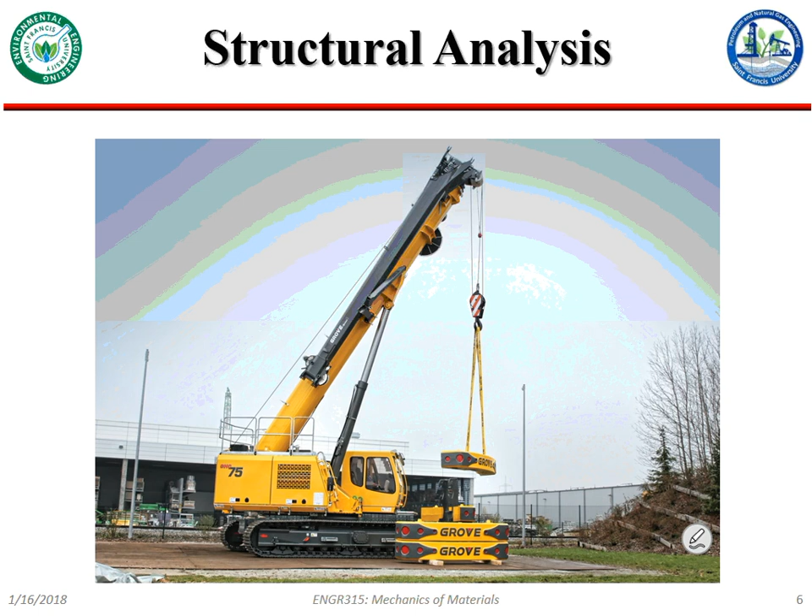So we're going to start with cranes. You're going to see this diagram a lot in the next week. If you have some paper, pull it out, because we're going to start with a quick static analysis of this, and then we're going to start throwing stresses and all that kind of jazz at it. If you want to sketch out this basic structure, you can imagine these 2 points here are both pin joints. Oh yeah, this is a pin joint too, so all joints are pinned. Ignore the gray thing, it's just kind of there. We have an arm here.

And if my sleeve didn't hit it, it'd be even better.

We have an arm here that's supporting some load. If you looked at the next slide, we're going to find out about it. And that arm is being supported by a hydraulic ram.

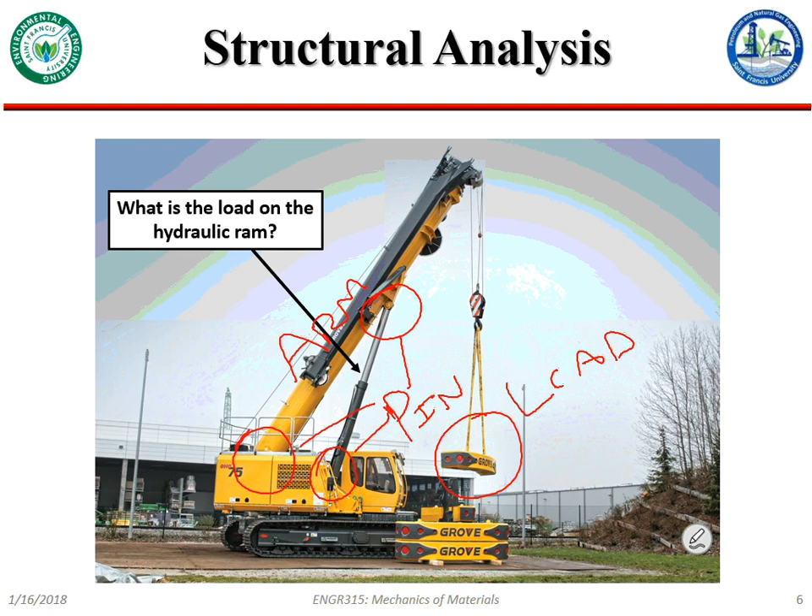So it's an 11,900 pound support arm. Turns out that cranes are really stinking heavy. And the length of this arm is 36 feet.

Got that already in there. Yeah, that should be all the information you need at present. So just let me know when you're done writing that down, because the next thing we're going to do is solve for all the forces acting on this.

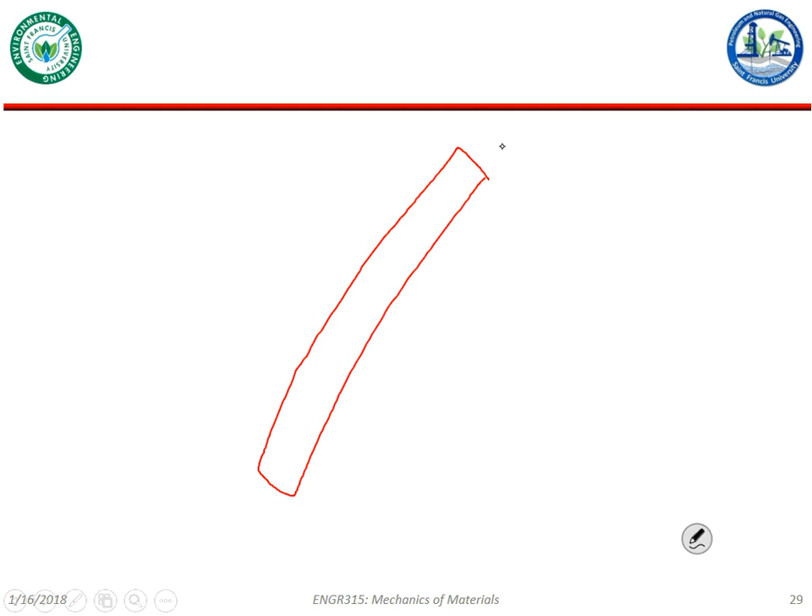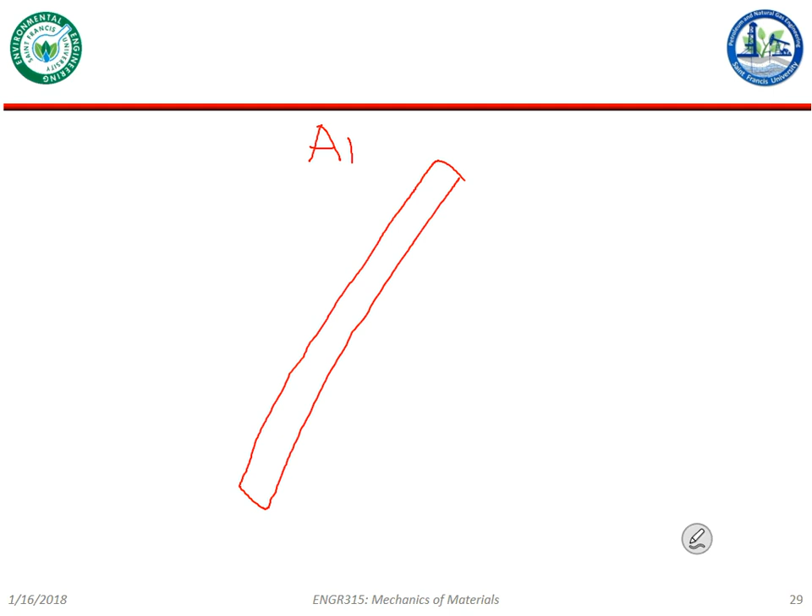Okay, so like I'd have something like this. So that's a really weirdly shaped arm. Hang on, let's see if I can at least draw a straight line. Okay, so this is the arm, say. Wow, that's a new one. Cool.

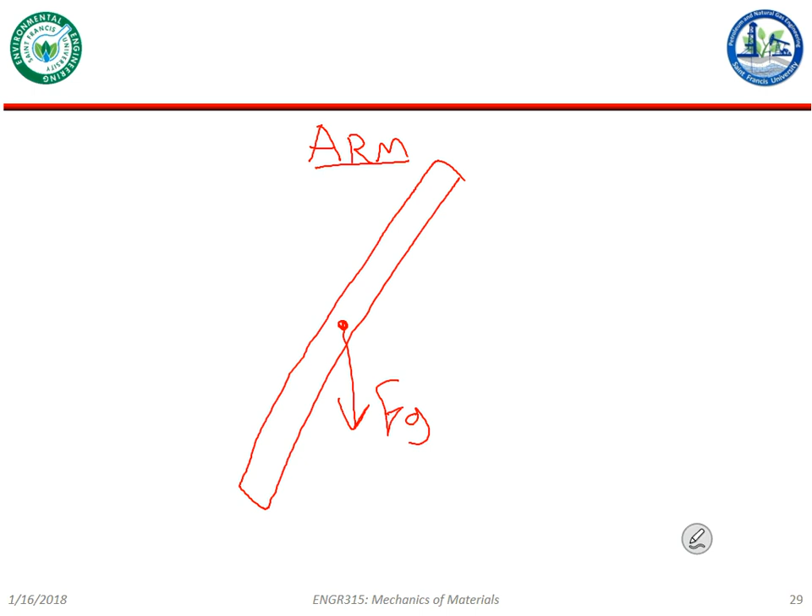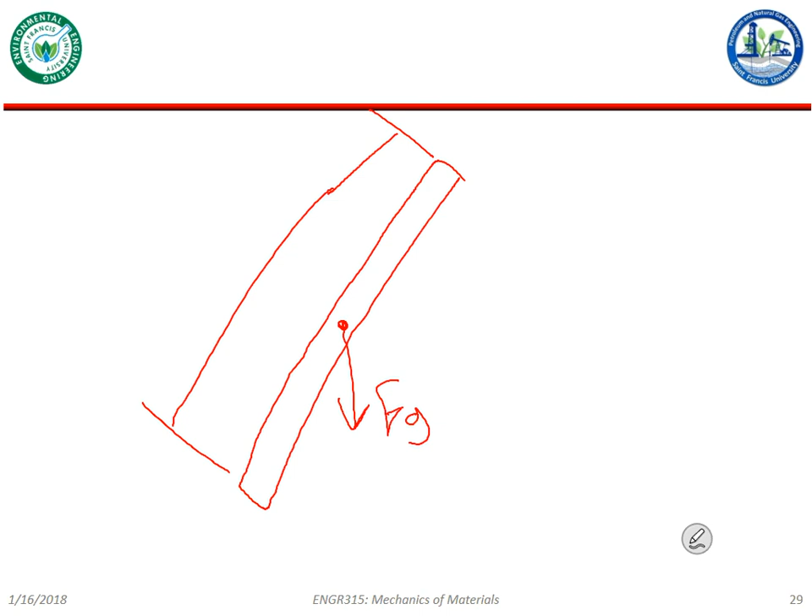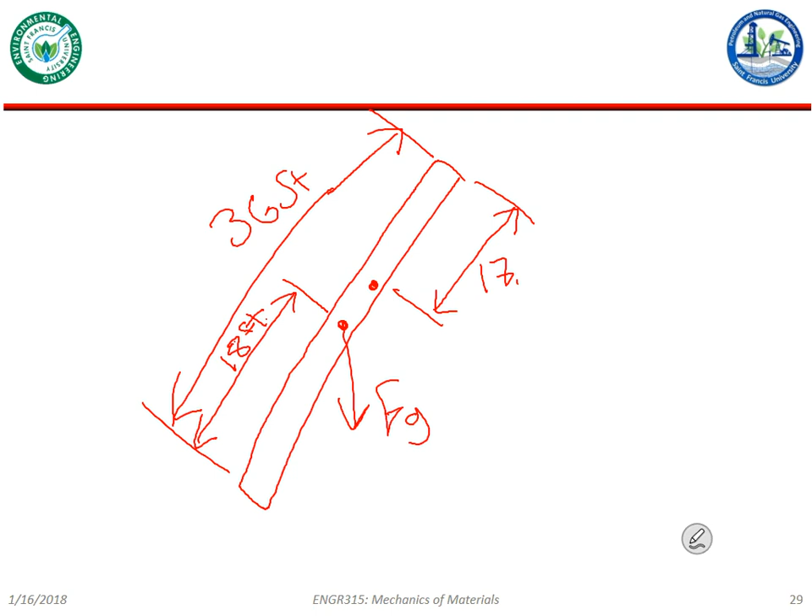Hydraulic arm, there's a ram in the middle. Okay, well, it's not exactly in the middle, it's 17.3 feet. Very, very good. So it's about there. This is 17.3. I probably need to get a couple more rubber bands for next time. 17.3 feet from the top.

We have a hydraulic ram pushing in. Do we know the direction of that? I don't know. Okay.

Let's look at that hydraulic ram. What are the boundary conditions on it? Okay, so it's angled 20 degrees from the vertical. But what's holding it at each end? Is it fixed? Is it like rollers? Is it a bearing? Is it pinned? It's actually pinned. It's actually pinned.

So can those pins resist moments? Can pins resist moments? The answer is no, right? So let me give myself a little more space here. So this is force due to gravity. If I have my hydraulic ram here, and it's pinned on each end, those pins cannot resist any moments.

Can this force generated from this pin or this pin generate any moments on this? If there are no moments acting on the hydraulic ram, can the forces create any moments? Does that question make sense? Yes? No? What? Okay.

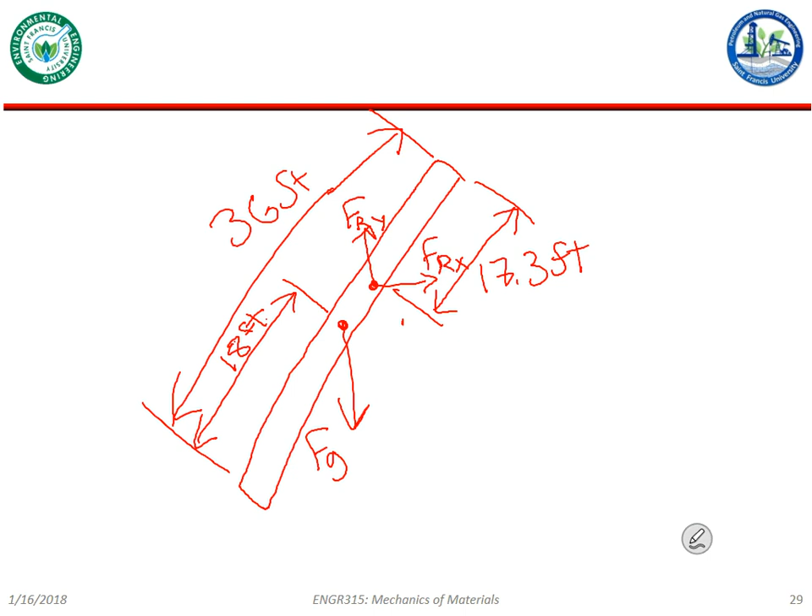Are there any other forces poking at the arm? The counterweight. So the thing dangling from the end, right? Okay, so it's going to be acting on the end. It's going to be acting straight down. Correct?

Cut. What else, if anything? Pin at the bottom. Correct. So again, we have two reaction forces from that. Okay, is there anything else? Check your sketch, because I don't have it up there.

Plus, any other forces acting on this? Do you want to add the hydraulic ram? That's this guy. And the earthquake. Oh yeah, right now we're just doing the free body diagram of the arm. Yeah, so this is just the arm.

Anything else? Okay, cool.

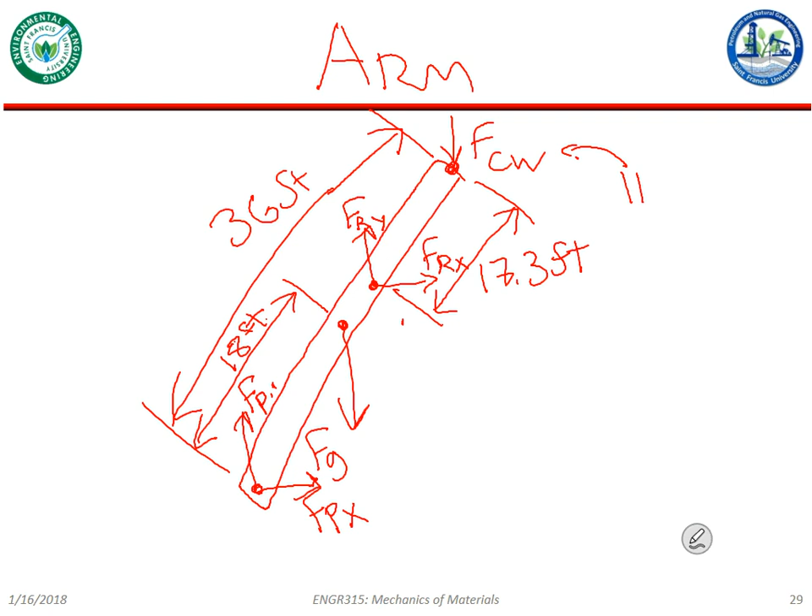So we got one force that we know, right? Because we know this, which is called this guy, is like 11,000 pounds, something like that, or 20,000 pounds. 11,900. Say again? 11,900. The counterweight. Thank you. Okay, so we know this guy, and we know this guy.

Although we should keep in mind that that 11,900 pounds is distributed across the arm. That won't make a difference for our static computation, but it will make a difference for the strength of materials. So, one.

Okay, so now we have two knowns, we have four unknowns, and we have a bunch of solving to do, right? But we have some tricks, right? Because we actually really only have a couple of unknowns.

So if we look again, hope this works. So if we look again at, let's see if I can do this. Nope, it didn't. So if we look again at the full system...

We have something like that, right? So we have the arm, we have the hydraulic ram, and we have this counterweight that's called, dangling off of the end. We have a whole slew of pin joints holding it all together. And actually, sorry, I drew this sloping the wrong way. Should be going like that, right? Oh, and this all is at some angle, some angle there that we'll fill in a minute. So this is what we got.

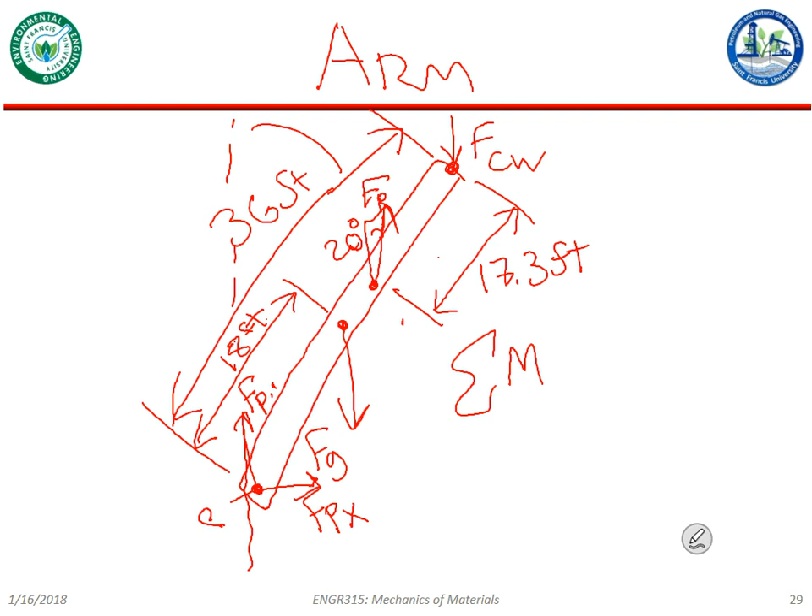Sweet, I like it. Thank you. Although it should be, yeah.

The stuff I'm writing now is just saying that the angle of the weight of what's called the counterweight and the force due to gravity are the same as the angle of the arm. Just kind of writing out stuff like that. But in the end, you should get...

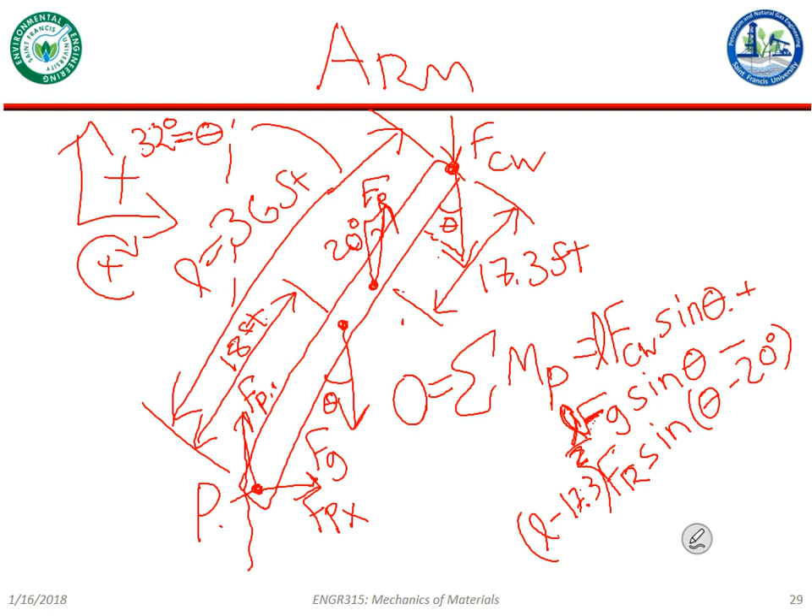What do we got? Say it again. 127 - say again. 329, and the units are pounds. Sweet, pounds force even.

Okay, cool. So we're getting something close to that, give or take how many decimal points we all decided to use.

Cool, alright. So that gives us one reaction, and we know its magnitude, we know its direction. So I'm just going to erase this because I have it written up over there.

Okay, so if we're all happy with that - well, I don't know if you're happy with it, but as long as we followed along, we good? Okay, cool. Alright, so if we know the reaction of the ram now, we should...

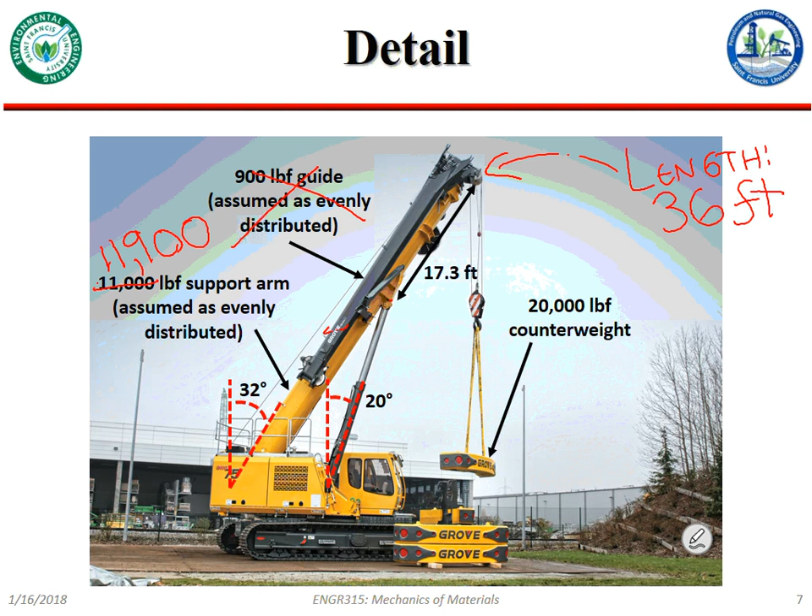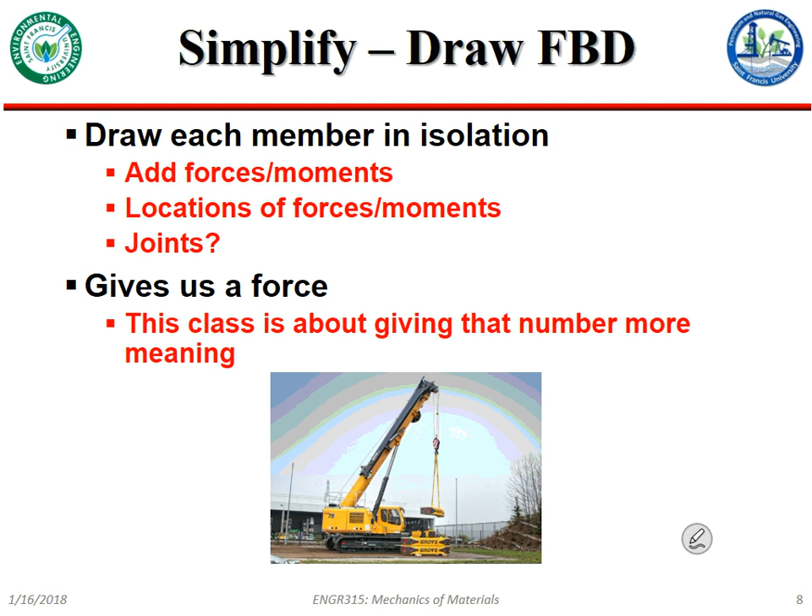All right, let's get back. So we know the force here, and that should be good to keep us going on. But as I said before, getting that force is only half of the game now. Your homework may look a little bit like statics, but again, we're trying to give that force some meaning. So once we have that, what do we do with it?

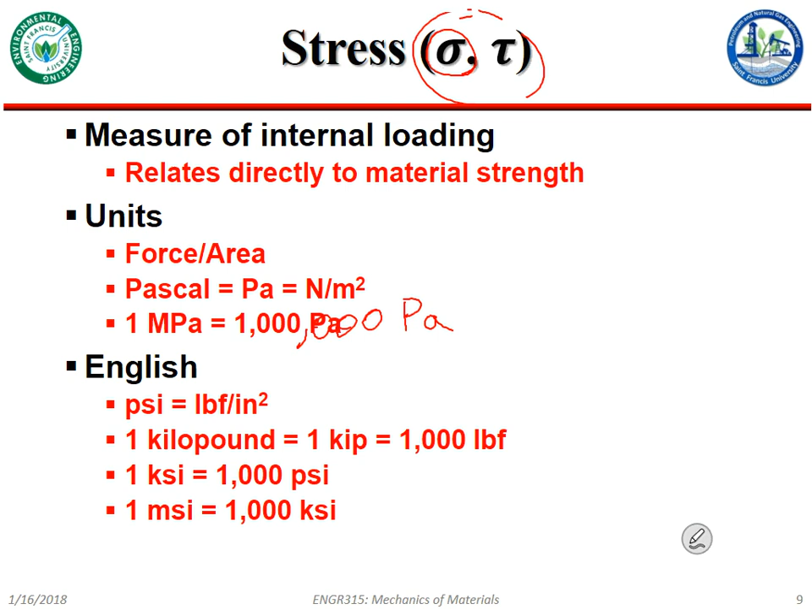So just some basic nomenclature before we get going. Also, these are the most commonly used things for stress. We'll go over what each one is as we go forward. But we're actually going to start with sigma. Sigma is most commonly used to denote normal stress.

Normal stresses are caused by a force acting perpendicular to a face. So if I'm pulling a bar apart, say, like I have a marker, I'm pulling from either end, I'm creating a normal stress in this marker or in this bar.

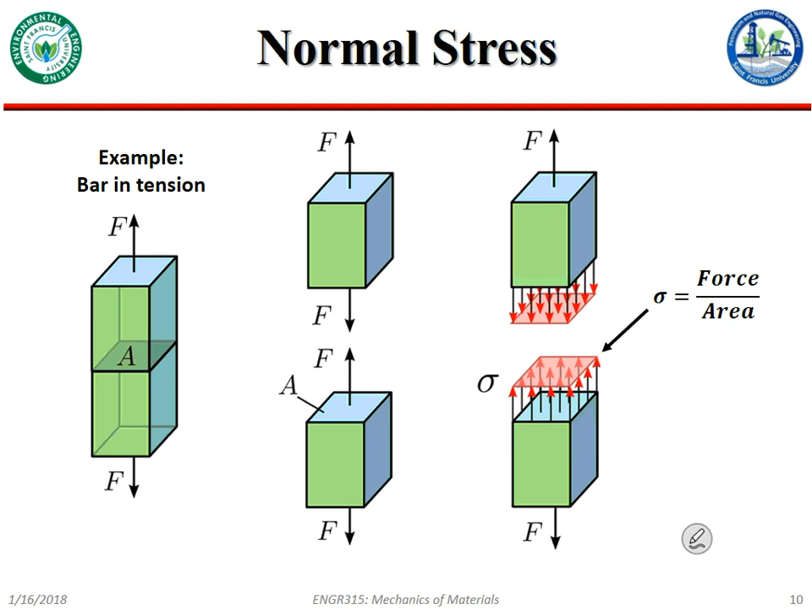We can compute it by taking whatever that force is. These are all what's called equivalent blocks, right? If I do my statics on each one, everything's equivalent to the whole bar. So I have my force, I have my area, my normal stress is equal to force over area, my average normal stress anyhow. It could be the actual stress acting over the area, but not necessarily. We're going to talk about when it is, when it isn't, and what to do about that as the class goes on. I just want to make sure we're aware of that.

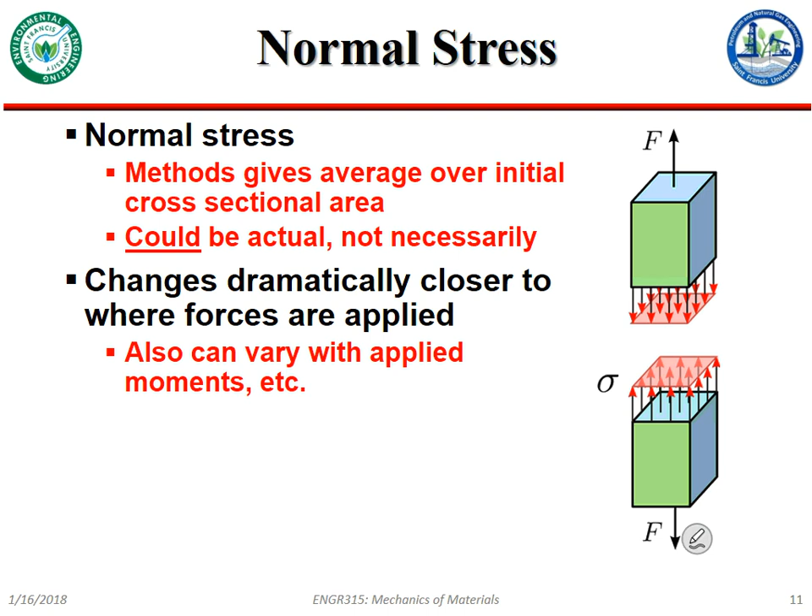So with that in mind, let's jump back to our crane. Again, this is 11,900 pounds. We know the force acting here. We know the force acting here.

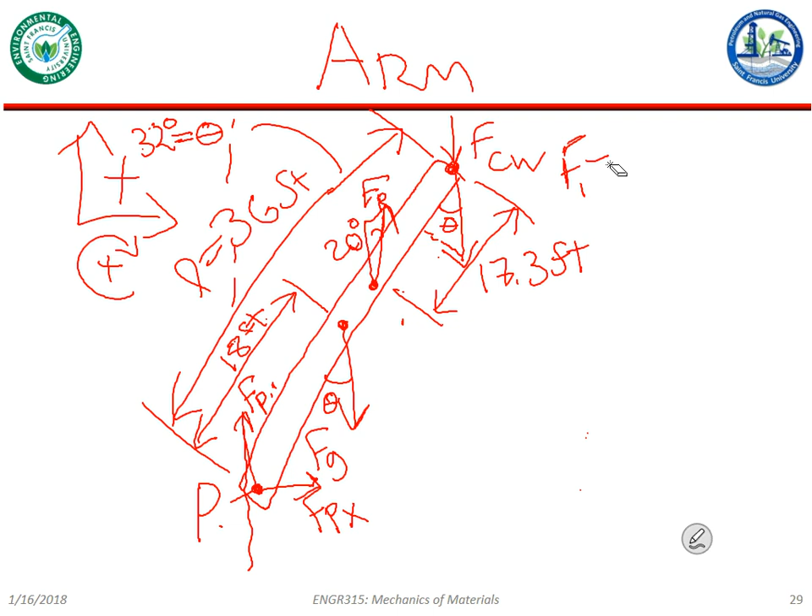Let's look at this hydraulic ram for a moment. So if we only look at that, we know the force acting on it. It's a two-force member, so those are the only forces acting on it. That is 127,329 pound force. There we go. So this is the ram.

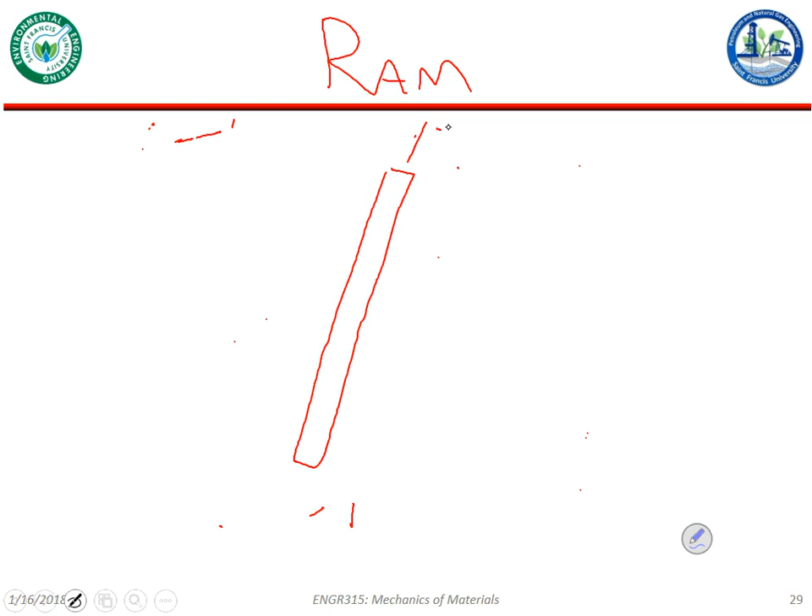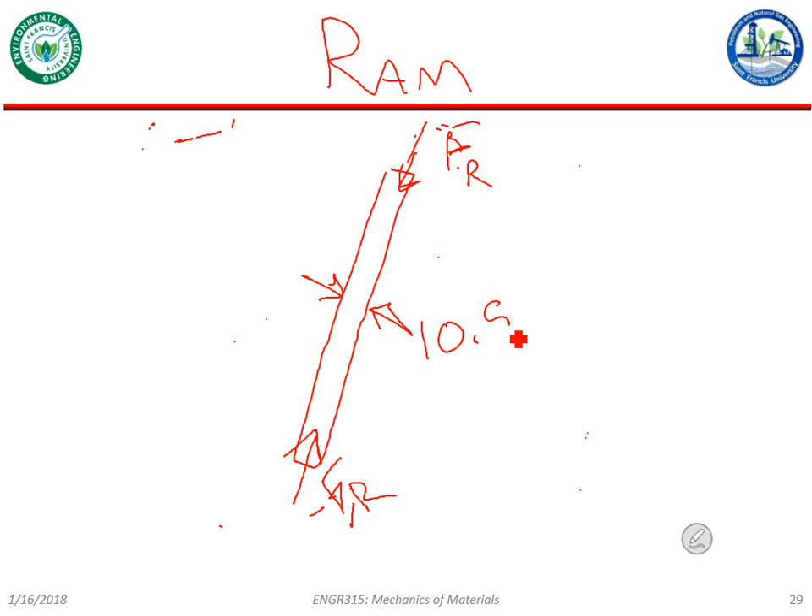We know that forces at each end must be parallel to each other and the bar by Newton's third law. They both must be equivalent to each other. So we know the force. Just check something - 10.5 inches. This has a diameter of 10.5 inches.

So how do I find the normal stress in the hydraulic ram? Find the cross-sectional area, which is 5.25. Okay, so we can say more conceptually something like this. Okay, nice job with the math on the fly. I really appreciate that, nice. So we can work with that, and that ends up being - it should be pretty close, maybe like 6. My guess is 6 something.

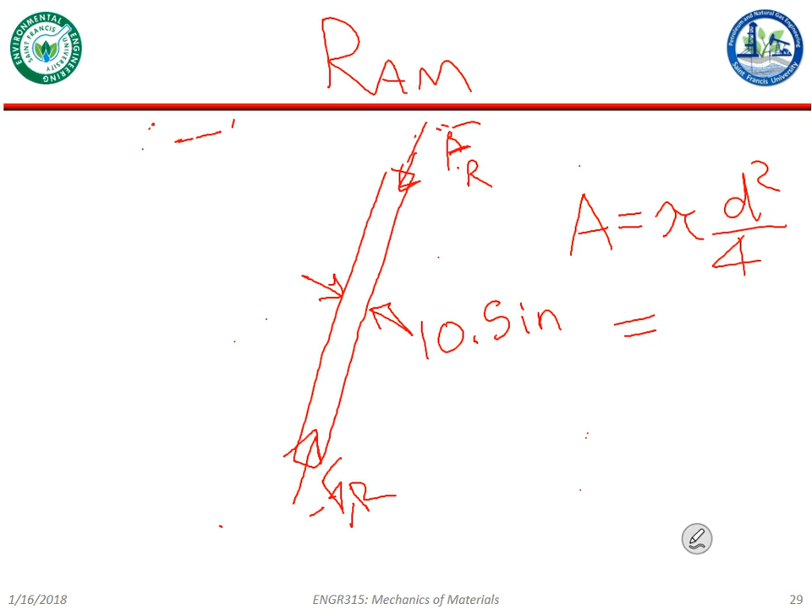We converted to feet - do you have to? What units is the stress? Force per area, found PSI. Yeah, PSI will work. 7.22 what - feet squared? If it was in inches, it would be 86.5. All right, so that's in foot squared, and 86.59 is inches squared. Okay, cool.

Cool, all right, so next, switch gears. So the next kind of stress we're going to be talking about is shear stress. This is the one that's normally denoted by tau. Two nice little simplifications for this are either single shear or double shear.

It's pretty much exactly what it sounds like, which we call shear. Instead of transmitting force through a single bar—like I have my marker, I'm pulling on each side—now I'm transmitting forces sideways. So here, instead of the force acting perpendicular to the cross section, force is acting parallel to the cross section. So the cross sectional area of interest in computing shear stress is the cross section parallel to the force, as opposed to normal stress where we care about the cross section perpendicular to the force.

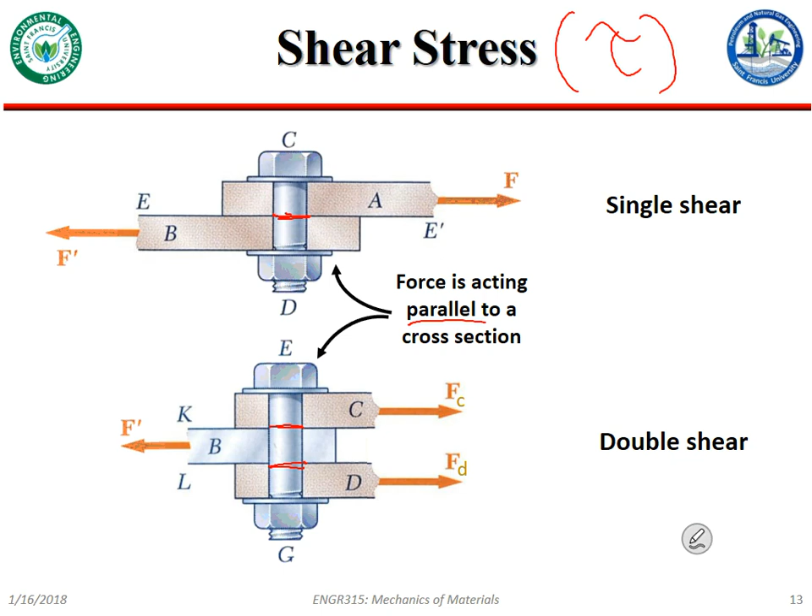So how do we compute it? This is a single shear example, so we have forces acting on each side. If we look at the internal forces, we cut this bolt in half along the plane, so we can replace it with a statically equivalent model, and we can get an internal force along this plane. If I backed up a slide, that plane would be right at the joint between those two boards that I'm pulling on.

So if I know the load at that point along that plane, I can figure out the cross-sectional area that is parallel to that force, and I can get my shear stress. Again, this is an average shear stress—you're going to be hearing that word a lot. It's not necessarily uniform across the cross section. We're going to be talking about that more later on.

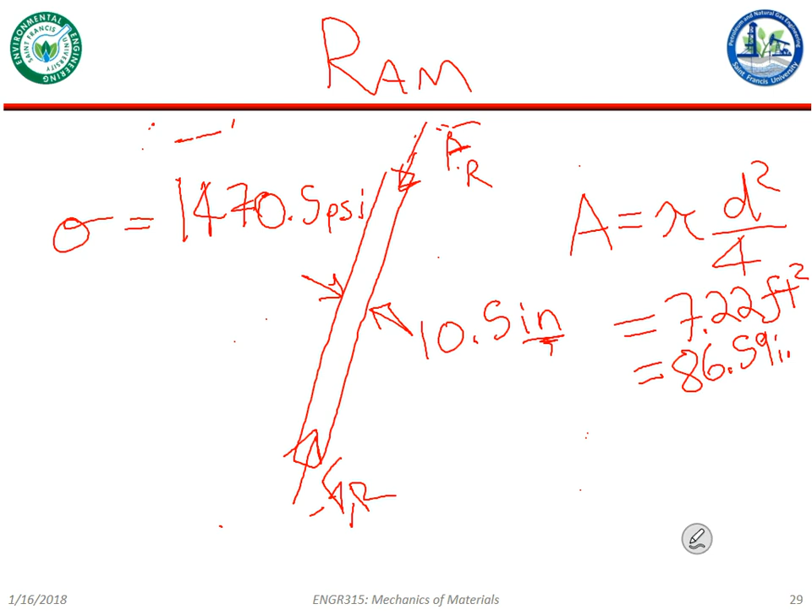So let's look again, not the ram, but the arm this time... okay, we're going to do this on this slide. This is 11,900. All right, let's first look at the shear stress in this guy. How would I go about finding the shear stress in that member? What do I need?

If normal stress was me trying to pull this marker apart straight out, and shear stress is kind of going across it, what forces do I need in order for shear stress to occur here? How do I find out the amount of shear stress in that member, if there is any? Would it have to be a pivot? It could be—so we have a pivot there, we have a pivot there. We have force, we have force.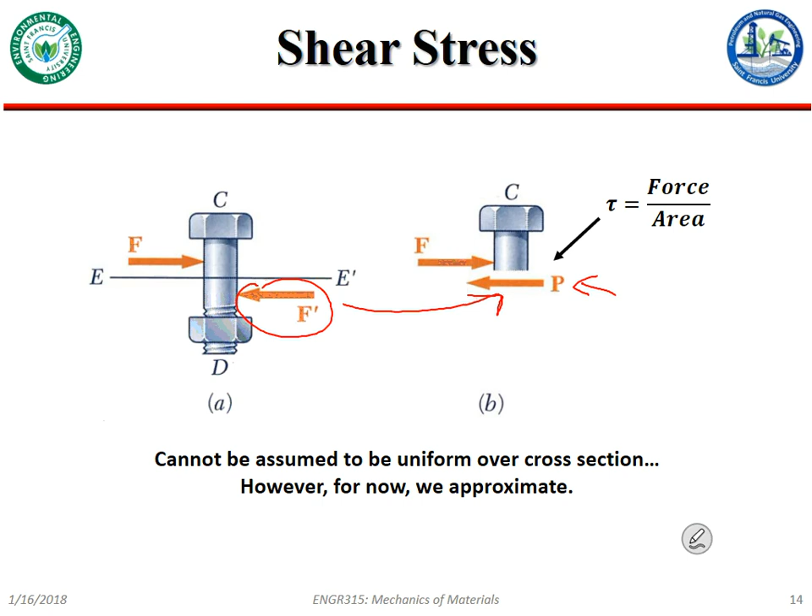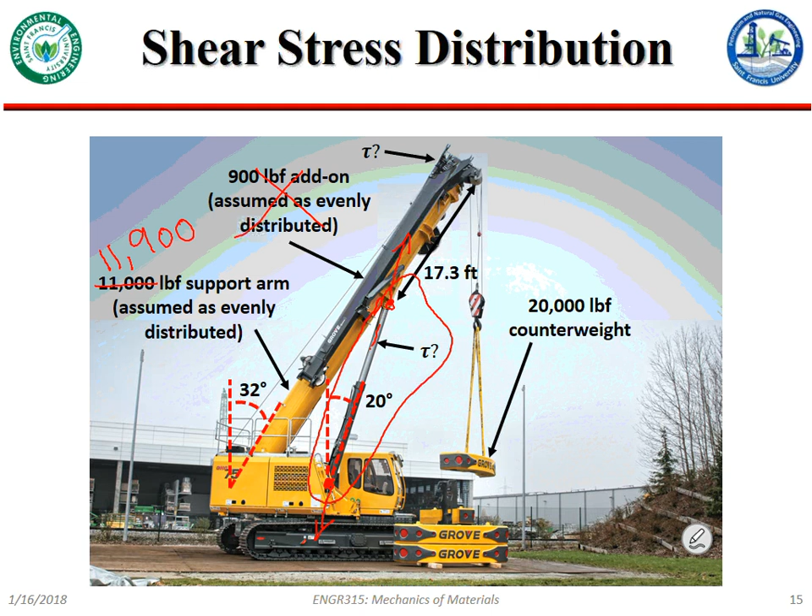However, what about here? Do I have any force that's perpendicular to the arm? Yes. Let's go to the very end—I know we're almost out of time. I have a 20,000 pound counterweight hanging there. What's the component of that will create a shearing force? Or rather, I'm just going to work it out because we are out of time.

I have 20,000 pounds going straight down. It's at an angle, theta equals 32 degrees—did I say 37? No, 32 degrees from the vertical. So if I take the 20,000 sine of that, I get my component of force perpendicular to the arm. That gives me half of my shear force equation. So 20,000 sine 32.

And the cross sectional area is based on it being 39 and a half inches. The cross sectional area is just pi d squared over 4. And that's your shear stress, if we assume that the arm has a circular cross section.